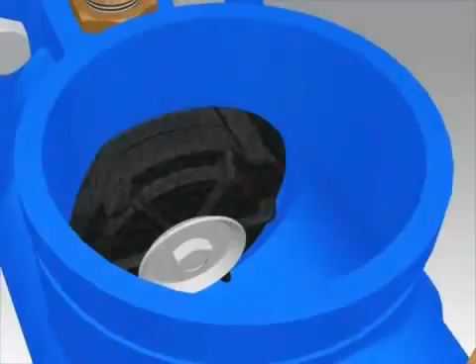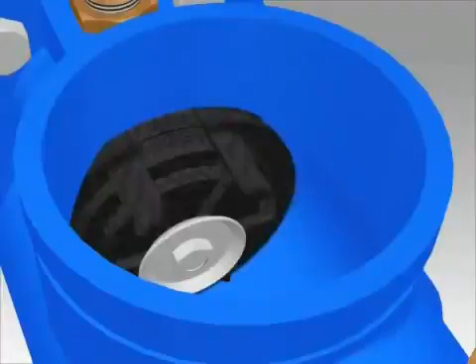To remove the number 1 check valve, locate the 2 tabs of the plastic retainer at the top of the number 1 check. Grasp the 2 tabs and squeeze ends together. Then pull straight back and the retainer should slide out of the groove. Remove the number 1 check assembly.

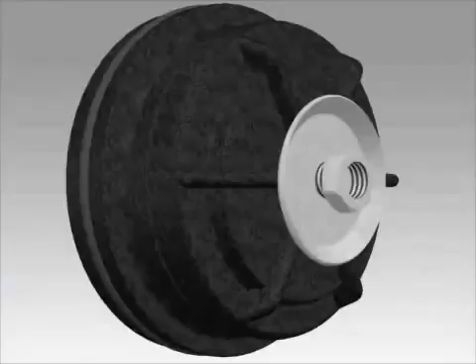Always service the checks one at a time to avoid mixing parts. Both checks can be repaired following the same procedure. Remove the nut from the poppet retainer on the check, then remove the retainer. Remove the seal ring and inspect the face for cuts or embedded debris.

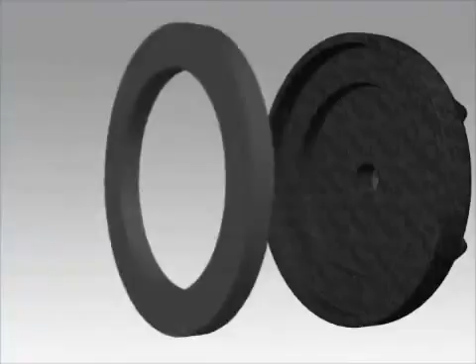For a temporary fix, you can flip the seal ring over to use the smooth side while waiting for new replacement parts. Inspect the sharp edge of the seat with your finger for any damage. Inspect the O-ring around the edge of the seat for debris or damage. Replace any damaged parts. If you are installing a repair kit, replace the seal ring, seat O-ring, and stem O-ring.

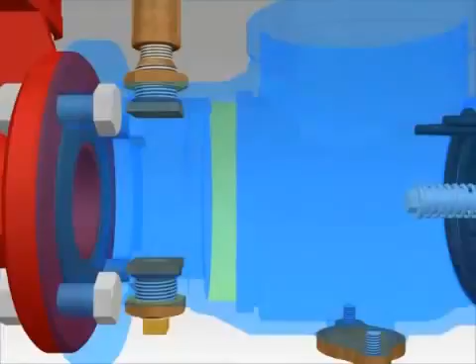Reassemble the check and tighten the retainer nut. Clean and inspect the O-ring sealing area in the body. Next, you will lubricate the seat O-ring.

To remove the number 2 check valve, locate the 2 tabs of the plastic retainer at the top of the number 2 check. Grasp one of the 2 tabs and push down to remove it from the groove. Then pull straight back and the retainer should spiral out of the groove. Remove the number 2 check by pulling straight towards the center of the valve.

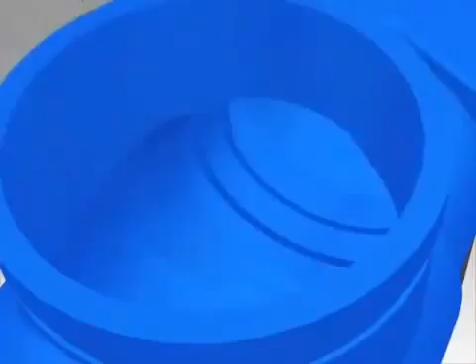After servicing the number 2 check, install it in the body, making sure it is completely seated. The groove for the seat retainer should be completely exposed. If the valve was not drained, water may squirt from the number 4 test cock as the check is installed. Close the number 4 test cock to hold the check in place.

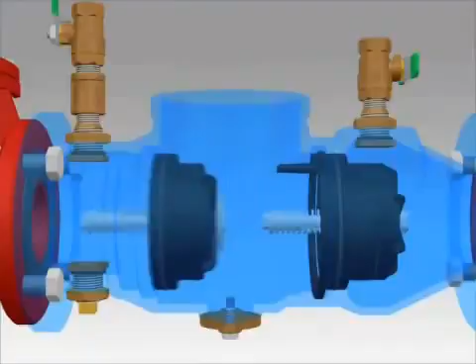Install the plastic retainer by inserting one end into the body groove and then sliding your hand around the face of the retainer, pushing it into the groove as you go. Install the number 1 check in the body and close the number 2 test cock to hold the check in place. If the valve was not drained, water may squirt from the number 2 test cock as the check is installed.

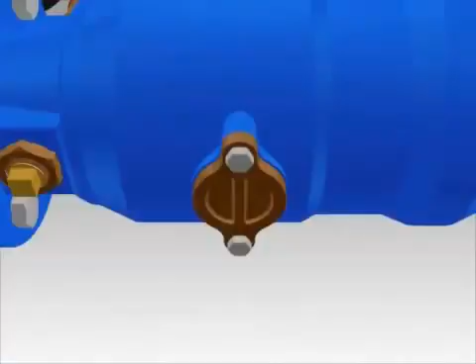Install the plastic retainer by squeezing the ends together and placing the lower part of the retainer in the groove. Push the upper part of the retainer into the groove until it snaps into place. If the bolts on the cover plate on the bottom of the valve were loosened to drain the valve, retighten them now. Be sure the O-ring is still in its groove.

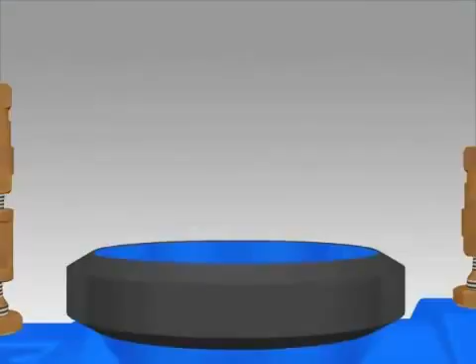Place the grooved coupling gasket over the valve opening. Lubricate the outside of the gasket. Replace the cover and reassemble the grooved coupling. Make sure the coupling is seated properly and the ends of the coupling halves touch. Close the number 3 test cock.

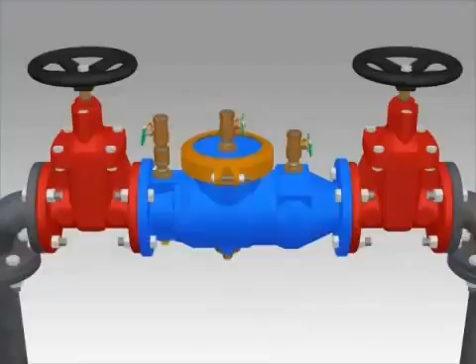Open your inlet valve slowly to pressurize the assembly. Inspect for any leaks. Open and then close test cocks to bleed air from the assembly. Open your outlet valve a small amount and wait for the system to pressurize. Fully open the outlet valve once the system is pressurized. The valve should be tested by trained personnel to confirm that it is working properly.